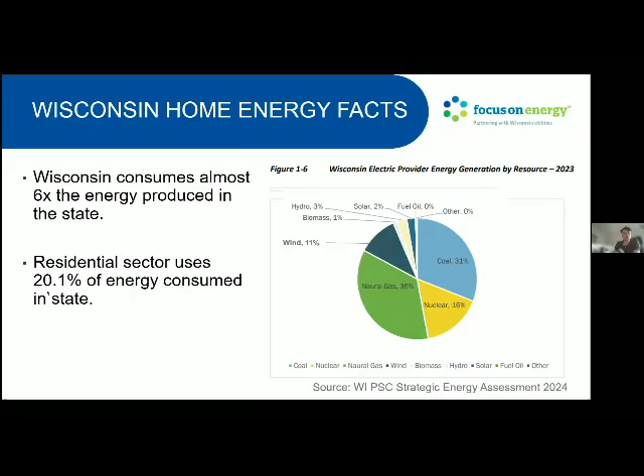I like this slide showing that 20% of energy used in the state is in the residential sector, because a lot of people say, well, it's Amazon, it's Google, it's Microsoft, these big giant companies - I know data centers are a little different, but it just shows that residents collectively are quite a big part of Wisconsin's historic energy use, which means there's an opportunity for impact.

I know this is from 2024, so rates have gone up a little bit, but I wanted to give an idea of what an average electric bill in Wisconsin looks like. Your home's age and its efficiency are going to be the biggest indicators of what this bill will be. But generally, if you're on budget bill, it's going to look like about $200 a month. If you're not on budget bill, it's going to swing dramatically - in the summer you're going to have high electric, and in the winter you're going to have high gas. But this averages to...

658 kilowatt hours of electricity per month, averaged. And you'll see that that's quite a bit more expensive than natural gas, but it's in around the 110 to 120 a month.

On natural gas, it's a little cheaper, but on average it's between $70 to $80 a month, and 72 therms. In the winter, that's going to be much higher. This is one of the indicators people use when they're not sure if their home is efficient or if they should invest in home energy projects. This can be one benchmark, so if you're quite a bit removed from the average, it could mean something's going on in your home, and maybe an energy assessment by a professional would be a worthwhile investment.

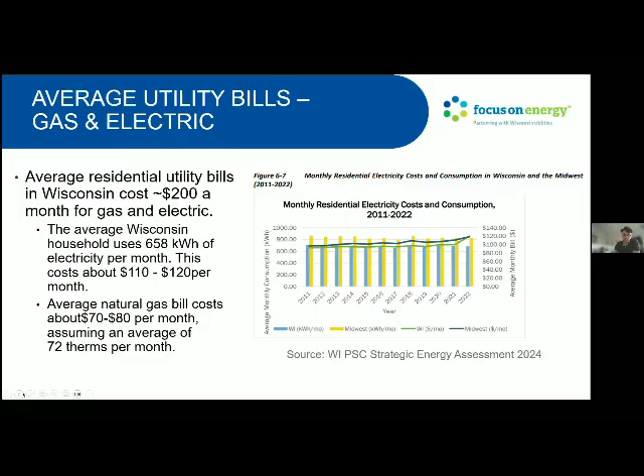Typically I can tell you where energy gets used in a home, and it's not where you think. I mean, I love to turn off lights and unplug things, but more than half of it is in the heating and cooling. So I have it broken down by the types of homes, and I'm going to focus mostly on single family, but a lot of this is for space heating.

I think air conditioning has gone up since this date. This was the most recent government federal data that I could find, and it is national. I think in Wisconsin our heating would be even higher, and our cooling now is starting to grow, but it used to be historically below average.

Water heating, it always surprises me that this is about 20% of your home's energy use. Lighting and other things are quite a bit smaller, and other appliances that are not refrigeration add up quite a bit too. Your dryer uses a significant amount of energy, as does your oven. An inefficient dishwasher can use quite a bit more water and energy for heating as well.

This is important, because when you want to think about ways to save, insulation—like sealing your home, making it tight and not losing air to the environment—is going to be really important. Then upgrading heating and cooling equipment to be efficient, then the water heater. In an ideal world you would go in that order for the biggest impact. I'll talk a little later about how life is not linear, right? We want to replace things before they fail, and the oldest thing first, but that would be our general advice otherwise.

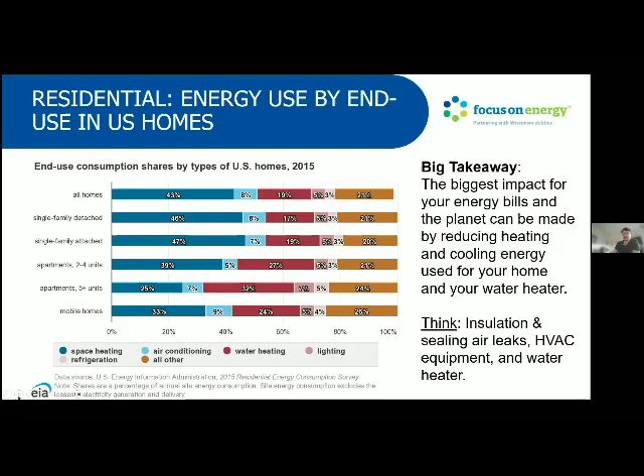I love this analogy because I love wool—my family's very British. So insulation is like your wool sweater, air sealing is like that windbreaker. If you've ever worn wool, when you step outside and it's windy, it goes right through it, but a windbreaker can protect you from that wind. Combined, they can keep you really reasonably warm, even though they're not a giant puffy down coat. A giant puffy down coat is going to be exactly the same—it's got a windbreaking layer, and it also has down as insulation.

We don't think about our homes like our winter outerwear, but another example, maybe for Wisconsin in the summer, is if you're drinking an ice cold beverage of your choice, a koozie is going to help keep it cold as well. So in the summer, when you're cooling your house, insulation plays a big role in keeping you comfortable.

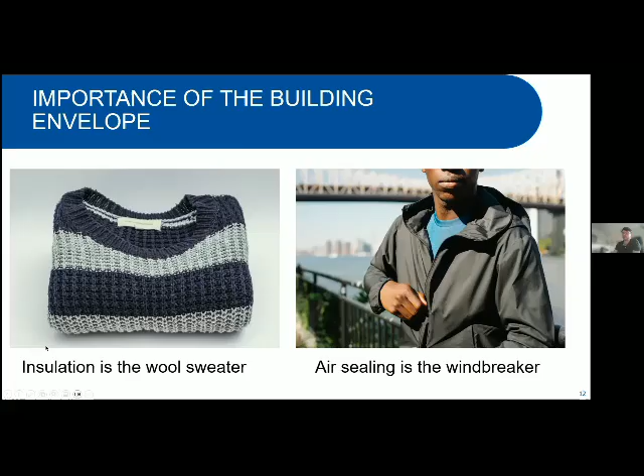This is a very similar slide, but if you're like me, a pie chart is a little easier than a bar chart. Like I said, Wisconsin's heating from the stats I could find is more like 50 to 55%. We are getting warmer, right, so I think space cooling is increasing a lot more, but generally my recommendations stay the same.

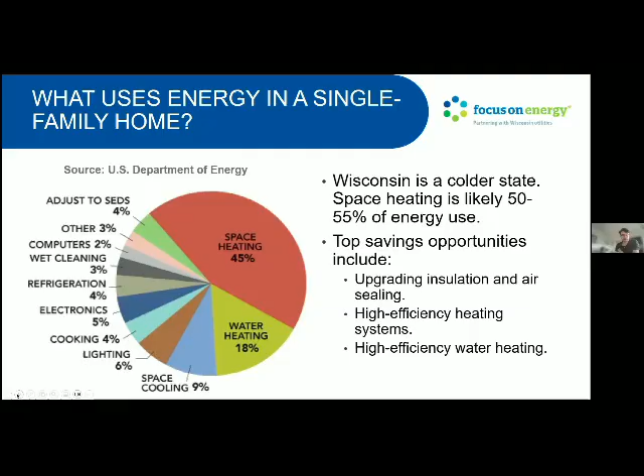A lot of this is a little redundant, so I'll try to highlight some things I didn't mention. I think the thing everybody can agree on is people want to save money, and saving energy always saves money. I wanted to mention there are two ways that happens: you have the immediate bill savings because you're using less, but then when prices increase, you're using less, so you don't feel the increase as much.

A really good example is this—and this used to be hypothetical, and now gas prices are $4.60—so I used to say if you take a truck versus a hybrid car, both get you from point A to point B.

But when gas is $2.50, obviously the hybrid is probably only going to cost you say $30 to fill up versus the truck might be $60. Now with gas prices what they are, the hybrid might pay $45, but the truck is paying $100. So not only was the hybrid always paying less, but that truck is now paying even more when the prices increase.

And so that's something people don't always factor in. I was just talking to the city of Green Bay, and they were saying that they've invested a lot in energy efficiency for their city buildings. Even though they've tracked the price inflation of energy, their bills have not increased as much as inflation because they've invested in efficiency. So I thought that was really, really cool and a good example.

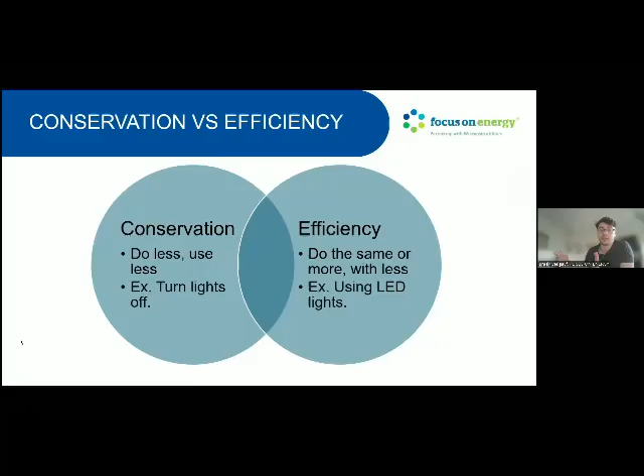Conservation is doing less and using less. An example is, growing up I didn't have a lot of money, so we would turn off lights. My dad, when we were cold, would say, well, put on a sweater, do jumping jacks, or have a cup of tea before we turn up the thermostat. That was all conservation. Efficiency is doing the same or more with less.

An example is LED lights. At times we need lights, so LEDs use a fraction of the energy that fluorescents and incandescents use in particular. Another example is you can have two homes, one set at 62 degrees in the winter and the other at 72. If the 72-degree home is efficient, they might still be using less energy than the person who is probably very cold in their house at 62.

So what I like about this is efficiency is all about not having to sacrifice comfort for energy savings. And if you do both, you save even more.

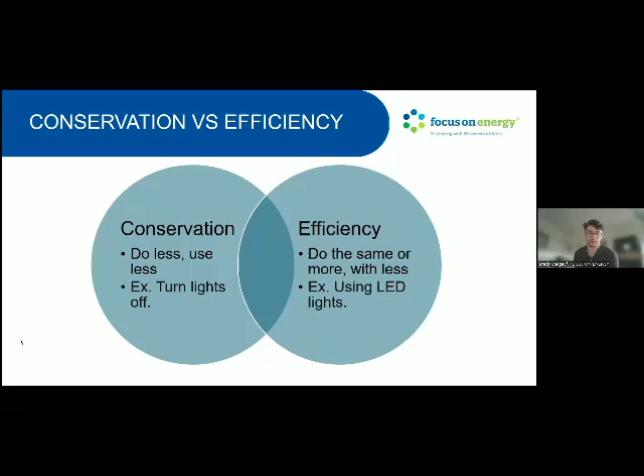Not everybody is willing to be as cold as I am in the winter, so I've learned that.

I'm going to skip through these, but generally we're saving kilowatts or kilowatt hours when we're saving electricity, and therms when we're saving gas. Sometimes when we electrify things like our heating systems or water heaters, we'll switch to British thermal units to compare apples to apples. That's a little bit in the weeds, and you can review these slides, so I don't want to spend too much time on it.

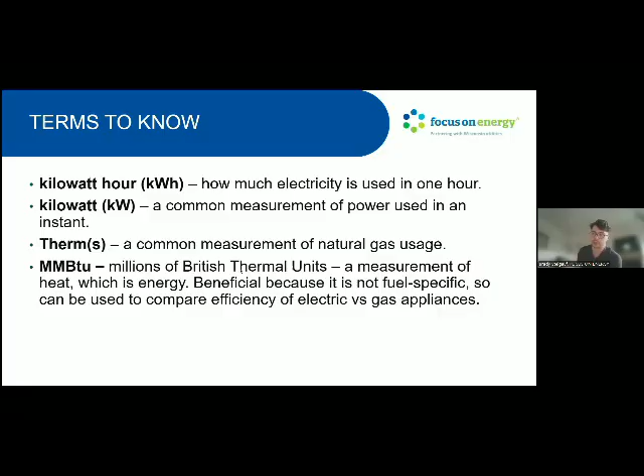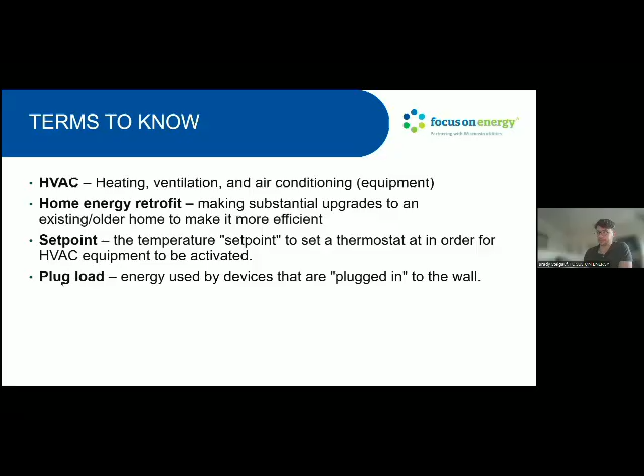Again, you'll get these slides, but I think these are really important, especially if you're talking to renters or seniors. One of the top things we've heard from Focus on Energy is people want free and no cost tips. What can I do today to get me started on lowering my bills?

These may not be the most impactful, but added together, some of these behaviors and conservation tips can add up. I have this study cited that they add up to about 16 to 20% of your energy use can be controlled by behaviors alone. The rest is really how efficient you're being.

Get your free energy saving pack. That's again, my absolute takeaway. Turning off lights when you're not in a room, that one's pretty no-brainer.

This is where couples fight, and I sometimes get odd looks, but you can set your thermostat in the winter down to, we say, at least 68 or lower, especially when you're sleeping. If you can set it back for 8 hours, or if you're away for 8 hours a day, set it back. Honestly, you can go down to 60 safely in your home, and you don't have the risk of pipes bursting as long as you're well insulated. And that can really save a lot. We estimate about 1% for every degree you change your thermostat for 8 hours.

In the summer, I know 78 also seems crazy. I get a lot of looks about this one as well. I will say, as long as you're dehumidifying your space, and the air conditioner will do that first before it can cool, fans will really keep you cool, and fans use literally a fraction. An air conditioner in your central air is probably the equivalent of more than 30 fans running. So fans cool people, not a room. So if you leave the room, turn off the fan.

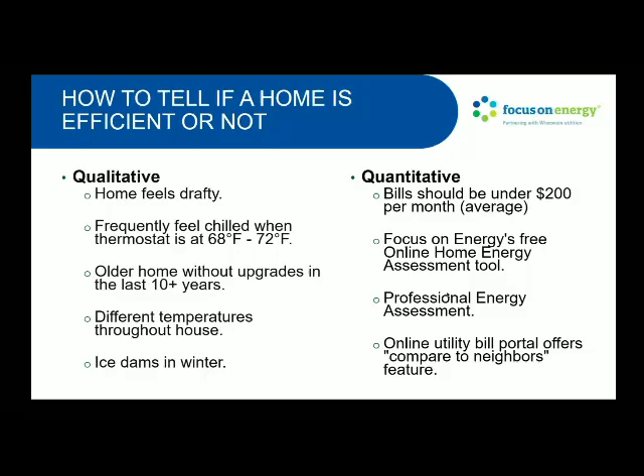I mentioned insulation—there are several different types. Some benefits I didn't cover are noise reduction, so if you live on a busy street or have air traffic, it can dampen that. Otherwise, this is one of the biggest and quickest paybacks for your home and really adds a lot of resiliency. So if the power ever goes out, even if you have a natural gas furnace, you're not going to have heat, but a well-insulated home should stay warm for many hours, if not days. A net zero or passive home, for example, uses insulation to stay warm almost throughout the year and hardly uses air conditioning. Insulation is very, very important.

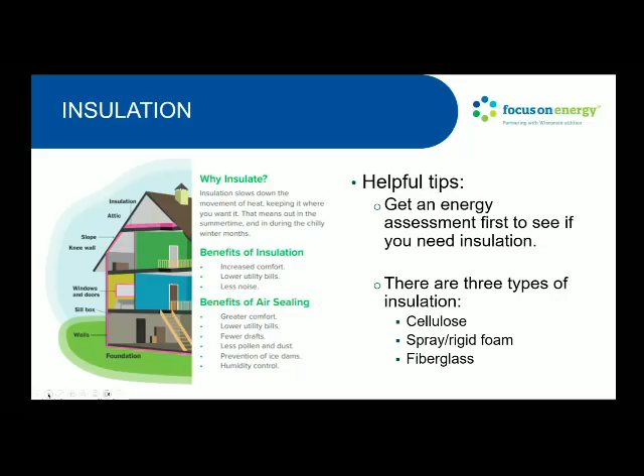This shows the air sealing and how they kind of combine. Essentially, your home acts like a straw or like a chimney. It's often called the chimney effect. So if air is escaping because you don't have insulation, air must come in, right? Just like a straw. If you suck through it, it needs to go somewhere.

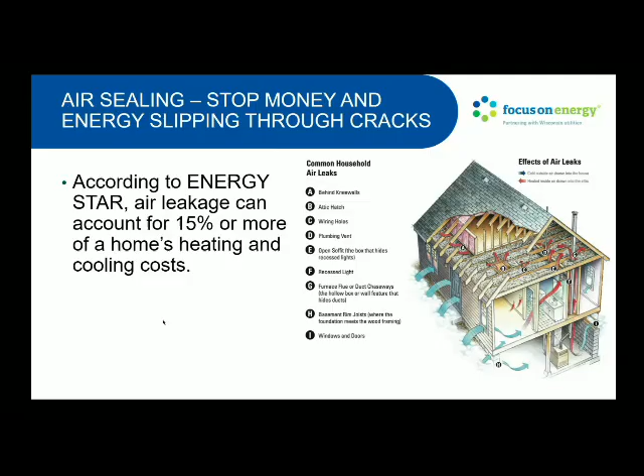So where is air coming in the winter? It's coming in from the basement and the cold frozen ground. So you're taking in very cold air, then you're heating it, and a lot of it is literally flying out the roof. In the summer, you just kind of bake and swelter with the sun beating down. So when you combine these, insulation and air sealing has really big energy savings.

Boilers, I think all I'm going to really mention is you want to look in the 90 to 98.5% efficiency. And that's what this means. Boilers can be very efficient, gas boilers. Electric options exist, but because electricity is so expensive and they go up to 100% efficiency, this makes them a lot less economical. When I talk about heat pumps, I'll talk a little bit about how that high electricity cost plays into it. But since these aren't that efficient compared to a heat pump, it's not economic to go electric this route.

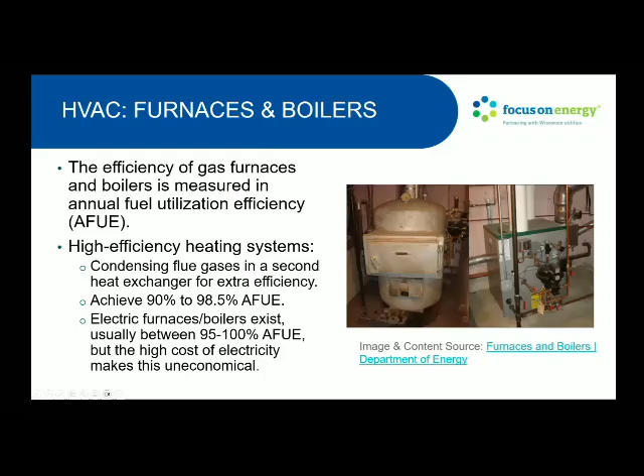Oh, so here's my slide on heat pumps. Heat pumps will sound like magic when I explain how they work, but I promise you they're not that complicated. They pump heat, and that's why they're called that. They can heat and cool, so they work in reverse. They use a compressor, just like your refrigerator. So your refrigerator is a heat pump, so is an air conditioner. Typically, when we're talking about heat pumps for heating and cooling your home or water heating, we're talking a little bit different, and they're higher efficiency.

Basically, they're moving heat and concentrating it. So your refrigerator is pumping out the heat from the box and moving that into your house. Or your air conditioner is pumping out heat into the environment and making the ambient air outside hotter so that you can be cooler inside. A heat pump can work in reverse, even at minus 15 to even now minus 20 degrees Fahrenheit, at pumping heat into your home and concentrating it. They work really well in temperatures around 45 and above. They're much more efficient than an air conditioner, and they provide really energy efficient heating.

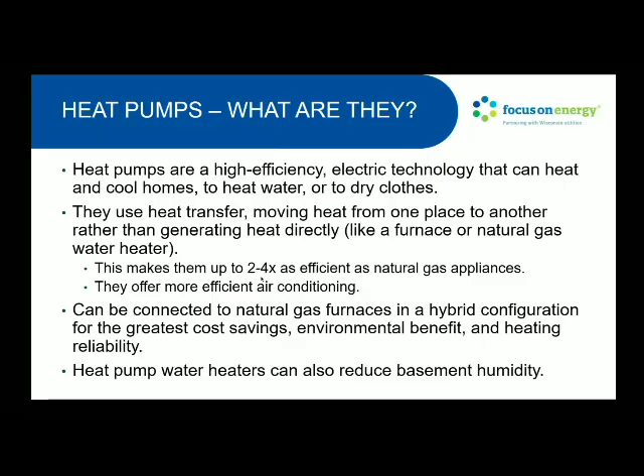As it gets colder, it obviously gets harder and harder to concentrate that heat. The more insulation you have, the easier it is for that to work. But that's where you'll start to see efficiency drop, and electricity prices, especially in Wisconsin, are much more expensive than natural gas. That is where you're going to see different cost scenarios. So they don't always save money. They save money mostly at 45 degrees or above on natural gas. So mild winters or spring, fall days, they're very efficient. For cost reasons, we recommend keeping your gas furnace for backup. You can work with the contractor to balance carbon goals, energy savings, or financial savings.

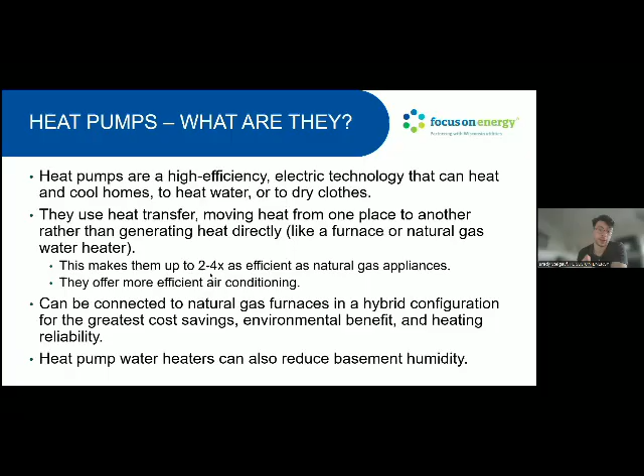They can also be used to heat water. So it's going to concentrate the heat in your basement into the water heater tank. The benefit of this is they will also dehumidify your basement, just like a dehumidifier is also a heat pump, or a compressor at least. And then they can also be used as a clothes dryer. So they will concentrate heat, warm your clothes, and that makes them a lot more efficient than a gas dryer, or especially than an electric dryer.

And I mentioned they can be connected. I like to call it hybrid. So if you think of a hybrid car, you can slam on the gas and get really fast acceleration on the highway, and you get that same benefit of the long range, for example. For your home, you can have a natural gas furnace for the really cold days when you need that reliability and cheaper gas. But on all the other days, you're saving passively with a heat pump.

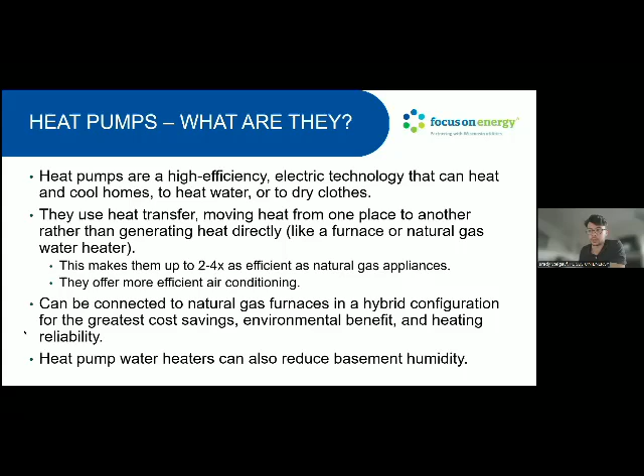Of course, if you have solar, the whole calculation changes a little bit, and you might want to use more and have your heat pump heat your home at a lower degree, maybe all the way down to 5 degrees Fahrenheit, because you're producing some of your own energy. So electricity is a lot cheaper for somebody who has solar compared to somebody who does not.

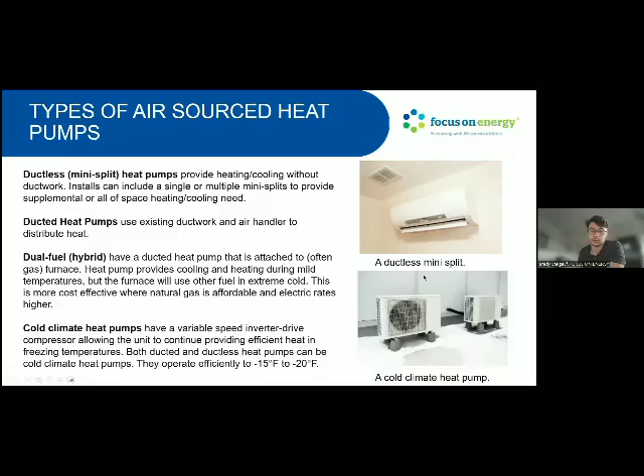You can put ductless systems. So if you don't have ductwork, or even if you do and you have some areas of your house that need additional heat or additional cooling, you could put these mini split heads anywhere, and each one can be a different temperature, which sometimes if you and the spouse disagree can be a good thing. But if you do have ductwork, it'll just take advantage of your forced air. This is also a really good option if you have radiators, but you want air conditioning, you can install these in different rooms to get extra comfort.

Ground source heat pumps work identically, but they're just not sourcing the energy from the air, which can fluctuate a lot in Wisconsin, as we mentioned. They are sourcing it from the ground, which is about 50 degrees year round in Wisconsin. Sometimes they'll also use a pond. Basically, in the summer, they're storing heat from your house underground. And then in the winter, they're taking that stored heat and pumping it back in your house.

So these are the most efficient, but very costly. I've heard quotes in the $40,000 to $50,000 range. I will say their return on investment, if you're living in your home or the improved value of your home, if you're willing to have a longer payback, this is the most efficient system you can do. For reliability, I think there's a lot of amazing reasons to go this route. I think it's so cool. It's just the upfront cost is huge, right? So that's usually why you don't see this being more common. I know there's some innovative solutions out there, but for now, this is sort of what we've seen.

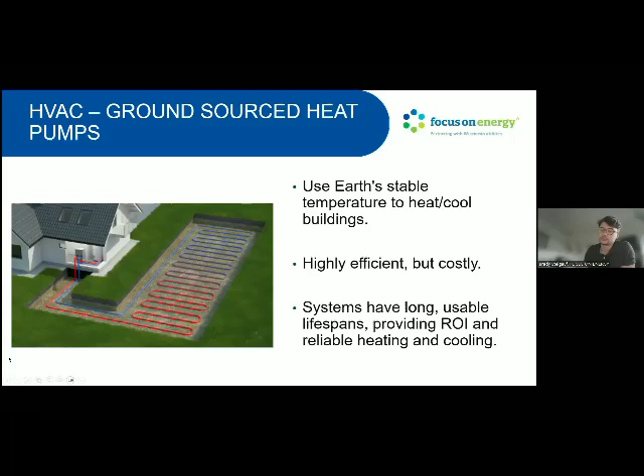I think I'm going to skip some of the signs it's time to upgrade your water heater and talk more about the types. So there's electric and gas, but within that, there's some different categories. Tankless are awesome because they're not using energy when you're not using hot water. So only when you run the dishwasher or shower or sink will they actually turn on. Indirect is kind of rare, but if you have a boiler, you can get an indirect water heater that'll take the waste heat from your boiler and heat up your water for very low energy.

And then heat pumps, I kind of covered this, but these are very energy efficient. Even with the higher cost of electricity, switching to an electric heat pump typically has some bill savings or at least net neutral, but you get that dehumidification, and I can tell you a dehumidifier uses a ton of energy, and you'll definitely see that in your bill in the summer for Wisconsin.

I think you can also get some that are hybrids as well. So you can use natural gas for when you use a ton of hot water. And the heat pump does take a little bit longer to heat that water. Having enough space for a heat pump in your basement is a constraint. So you need to have some space in your basement, enough air for it to concentrate. The temperature might drop 5 degrees if you're using a lot of hot water, like several people are showering, but generally you won't notice too much comfort difference.

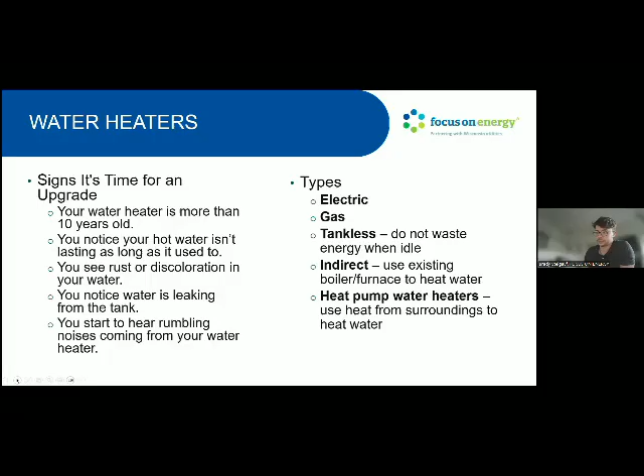Let's talk about windows. Windows don't save as much as people think. Generally, insulation and the area around the windows and where the window is installed is a bigger source of air leakage than a window. Even the most efficient window is essentially a hole in the wall. And there's only so efficient that you can get with a hole in the wall. Although they're beautiful, they improve quality of life. You get to watch the wildlife outside.

What I will say is if you're considering window upgrades, make sure you've done the insulation and air sealing first. And I will say soon, Focus on Energy will have small rebates for if you're replacing single and double pane windows. It is modest because we really want to steer you towards the insulation and air sealing.

Smart thermostats: I'm showing you Focus on Energy rebates are usually $50 to $75.

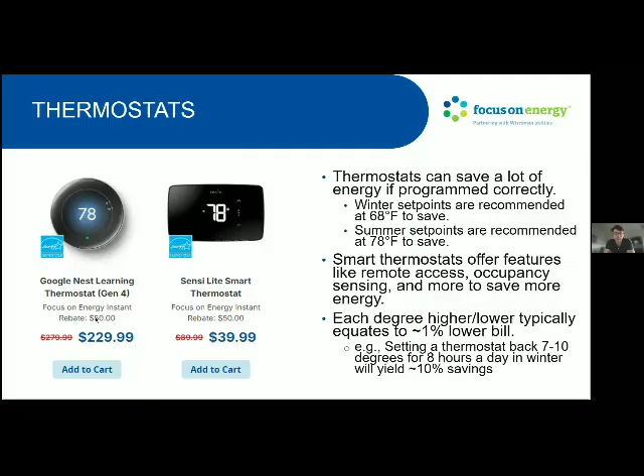Usually what I want to say is, a lot of people say, I have a programmable thermostat, no, thank you, I don't need that. And programmable thermostats are great, especially compared to the ones that you can't program. But I know life can be busy. Often I will forget to change my settings in my thermostat. You program your thermostat for what 75 to 80% of your life is. That other 25%, you're at the cabin, you're going out, enjoying your life.

If you have a smart thermostat, it's saving you energy 100% of the time. We estimate they save at least $100 a year. They even give you analytics of how much energy and money they're saving you, and you can give them some settings like I want to save more, I want to be more aggressive, or I want to focus on comfort a little bit more. But I think they're amazing for these reasons. They can be quite cheap, and sometimes we have sales from the manufacturers to bring them down even lower. So pretty significant energy savings.

One myth I will dispel that I hear a lot is it takes more energy if you set the thermostat back to then get back to the temperature, whether that's a furnace or an air conditioner. And that is not how air conditioner units or furnaces work. So if it's a hot summer day and you're gone at the cabin, if you turn it to 62 to get it colder, you don't get colder faster. Your air conditioner is working as hard as it can to get to the temperature that you want it at. So you're wasting more energy by setting it super low.

Or in the winter, you're freezing, you just were out cross country skiing at Lapham Peak, for example. If you set the thermostat to 80, you're not going to get warmer any faster, right? The furnace is going to blast. It's going to be the same temperature no matter what. However, your furnace is going to try really, really hard to get to 80 degrees or whatever you set it to. A heat pump does work a little different.

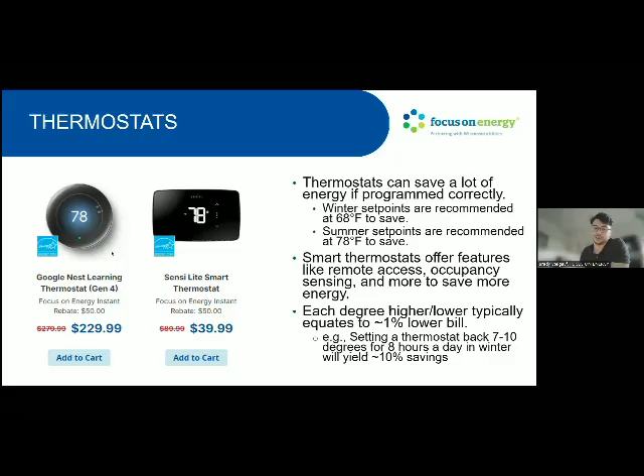I think induction is so cool, but we'll see what you guys think. It's not the same as electric. I want you to know that. It's powered by electricity, but it actually works the same way as when you wirelessly charge your phone. That's using induction technology. It's basically using a magnet. So it creates a magnetic current, and that heats the pot directly. So your cookware does matter. If you can stick a magnet to it, it will work on an induction stove.

They are 90% efficient, so hardly any of the energy is being wasted when you're cooking. That makes them exceptionally fast at boiling water, like a whole pot in 5 minutes or less. Electric ranges are also very efficient because you have a direct coil on the pot. Versus gas ranges, I know many people like them because you can easily change the temperature. They're only about 40% efficient since combustion is never that efficient as an energy source. Most of it is escaping around the pot and heating the air around it.

The other thing I will say about induction is, maybe I'm blanking. They're very easy to clean since there's not a coil. That was what it was. You do get the same temperature control that you get with natural gas. So it's instantly cool, instantly hot, because it's not electric resistance basically creating a giant hot pad. This is heating the pot, not the actual surface. There's reduced indoor air pollution compared to natural gas.

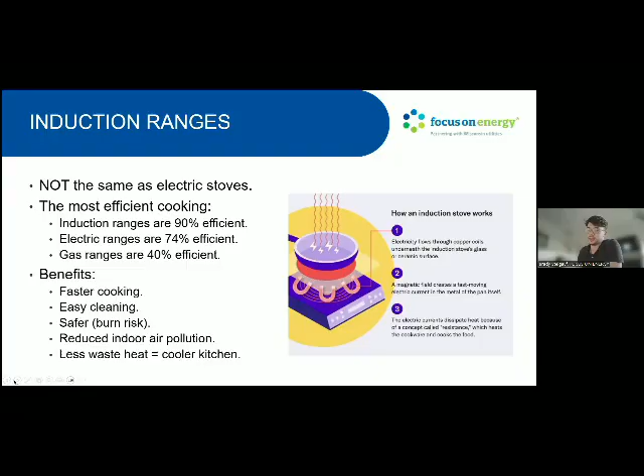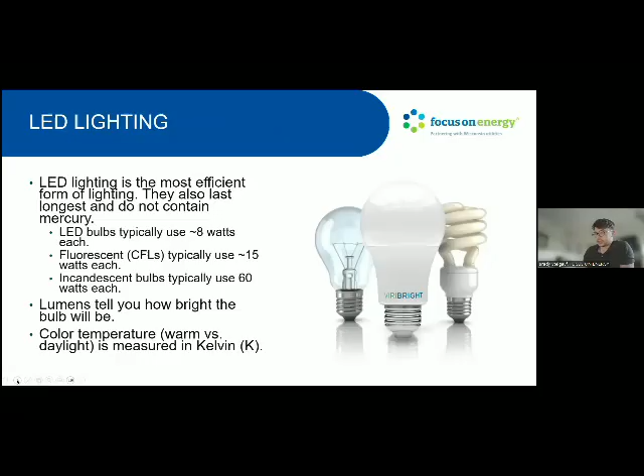I'm going to skip this because I kind of covered LEDs. If life was linear, which it absolutely is not - my life has taught me that - this would be what we recommend based on energy savings and how easy things can be.

So we would start with the free space, which I'm going to call our free energy saving packs that get you started. LED lights, because you don't need to be a genius to screw in a light bulb. Smart thermostats, again, just because they can make use of your existing equipment and really help you save. When you're reducing water use, like I said, 20% of your energy is being used for hot water, so especially if you can wash your hands or clothes or laundry on cold, that's going to reduce quite a bit of energy.

I often also, with the washing machine or the dishwasher, will use air dry instead of heat dry. That saves a lot of energy.

The next thing I would recommend is an energy assessment, just because I can give you these general tips, but an energy assessment gives your home a concrete description of how much energy you could save, how fast the paybacks would be, and the incentives that Focus can give you. So it's really a customized roadmap to your home, which would let you know if you need insulation and air sealing. Sometimes your ductwork will be leaky, especially if it's older, and that means your furnace or whatever heating and cooling system you have has to work harder, because in your vents, you're leaking it through till it gets to the register.

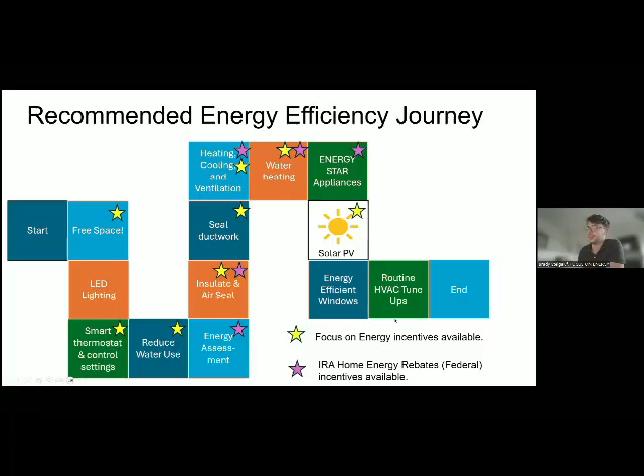So life happens. Honestly, I think we could meet most of our carbon goals if before something failed, you replace the next thing with a high efficiency electric option. That makes it a lot less scary than changing your whole entire house tomorrow. I think if we all did that, we'd make a lot of progress on our climate goals.